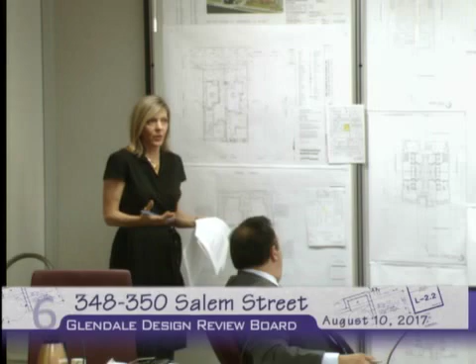This proposed site plan is very consistent with a lot of the multifamily residential projects being proposed along Salem Street. There is additional common open space at the rear for use by residents, and the roof plan notes a significant square footage, almost 1,000 square feet plus of roof patio area to be used as common open space as well.

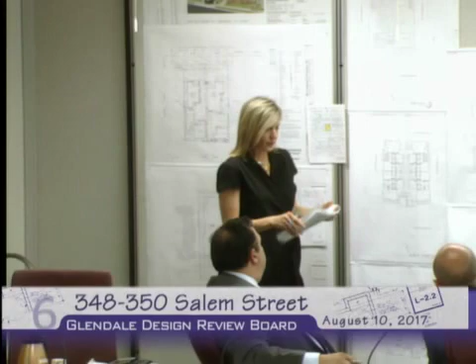In regards to the actual mass and scale, the project complies with the height standards for multifamily residential. It is 3 stories, featuring step backs and tiering sections as noted on the elevation drawings, with different use of materials on certain elements. There's a very decorative front facade that screens the elevator and stairwell, accented with additional fenestration patterns of glazing, horizontal and vertical, and changes in material and plane.

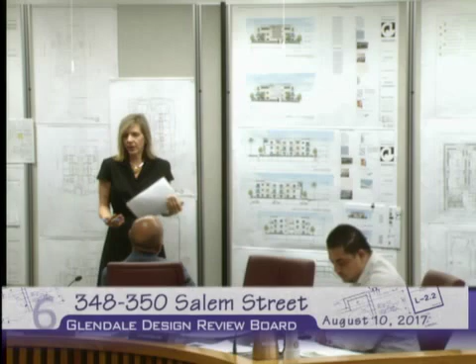With that breakdown of the elevations, the entire building mass does not appear as large. Last but not least, it's a contemporary design that fits within the neighborhood, since this neighborhood along Salem Street is rather changing. Most of the latest construction is contemporary, with clean lines, clean finishes, stucco materials, grays, tans, and whites, giving an overall crisp, streamlined architectural style.

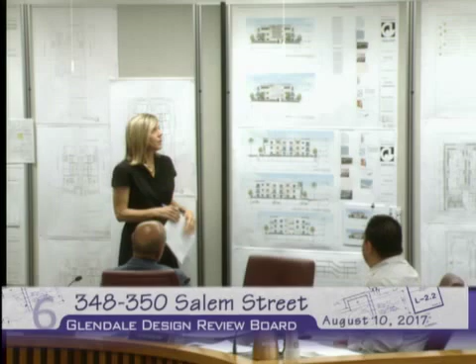The project complies with all of the zoning standards for the R1250 zone. That gives a brief overview of the staff presentation; the staff report went into much greater detail, but I'm available to answer any questions you may have.

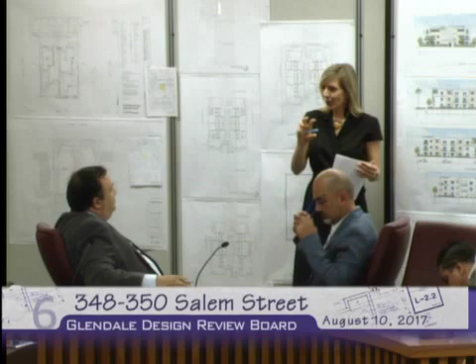I have a couple of quick questions. It looks like there's a couple of design options being floated, which is kind of strange. I'll allow the architect to speak to that, because there was some discussion regarding the modular patterned block that is actually transparent, not a solid block. There was staff discussion about whether it's too angular or too whimsical, so the architect submitted two alternatives: one a more circular bubble pattern for the block, and the other a much more regulated, stylized version with straight edges.

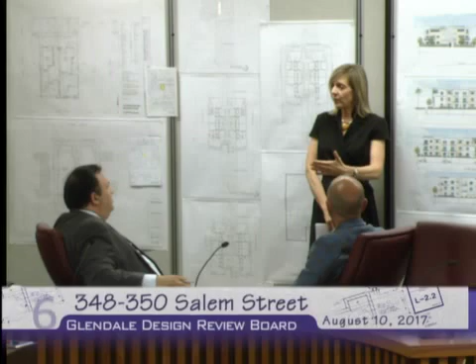On the public space requirement that gives an extra unit in front - is that public to the building or public to the public? It's not really public to the public, it's additional common open space, so the entire building has to be set back even further. As opposed to having greater density pushed out to the front of the street, the density is held back from the street, giving more relief at the street edge, with that area being landscaped.

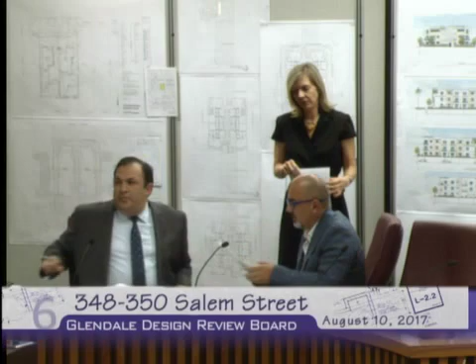I have a question about condition number 4, can you explain that a little bit? It's a little confusing. Staff is recommending approval with 5 conditions, and the 4th condition is to clarify the fence wall elements above the subterranean garage podium along the interior property lines, identified on section drawing sheet A4.0.

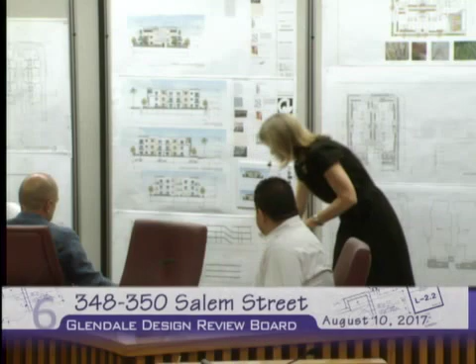To comply with the zoning code, the combined height of the garage and any solid wall or solid fence atop the garage in the setback area must not exceed 6.5 feet adjacent to the ground level design. So when looking at the adjacent grade, the neighbor's fence wall above the podium on the garage side, if it's above a certain height, has to be more transparent and more open - it can't just be a solid wall, which would emphasize a mass next to the adjacent neighbor.

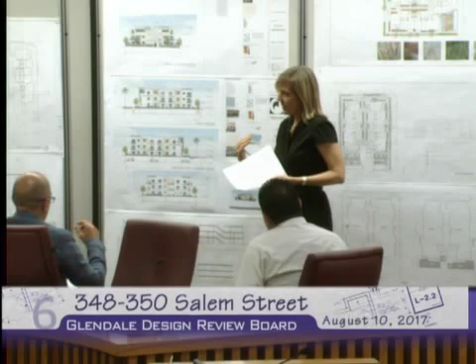Is there a section that shows that? Because it seems like everything is below grade. We're just stating this as a prelude for them to submit into plan check - just a note that your fence wall has to be transparent on the upper portion. So if further engineering is done down the road to make sure this is buildable, we don't want to see a fence wall larger than 6.5 feet.

6.5 feet, correct - and that's measured from the adjacent grade to the top of whatever railing or fence they have. So anything above that, if they need, say, a 3-foot retaining wall for the garage and then another 4 feet on top, that extra portion has to be open at that point - it has to be a wrought iron fence or something compatible but open, as opposed to a solid block wall.

And just to go over the other conditions: the first would be to reevaluate the colors and treatment of this rear facade, facing the neighbors directly to the back, to make it more consistent with the other 3 elevations. The second would be to provide gates or extend the landscaping planters to provide separation between the private patios and the common walkways, to make that a more meaningful separation between the two.

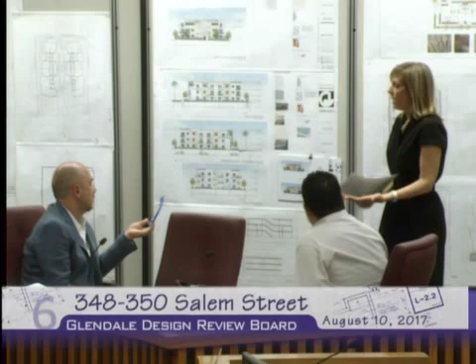Well, they're using the same colors. They're proposing, unlike here where you had these elements that break up the facade as opposed to one long white facade, here there's just a solitary, very narrow vertical element on the ends. So it's not the color, it's more the use of the material. Whether it's the material or the color, I'm going to allow the architect to use his expertise and creativity, but to mix it up a little bit more as opposed to having a solid white wall along the rear.

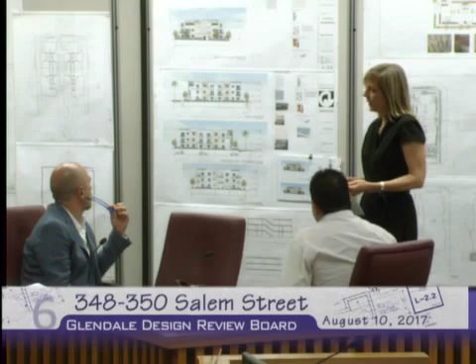That explains it. Okay, we have two cards.

The applicant, Andre, if you want to. I'm... well, sorry, you're going to have to speak into the microphone and introduce yourself. I'll just pass it to Jean-Pierre. So if you don't mind stating your name for the record, please. Good evening, Jean-Pierre Valadian, address 408. Jean-Pierre Valadian, we're the designer of the building, and thank you.

I went over the conditions, I have no problem with the conditions. We'll clarify it further during the plan check process. And then, as regards the rear elevation, we'll work it out.

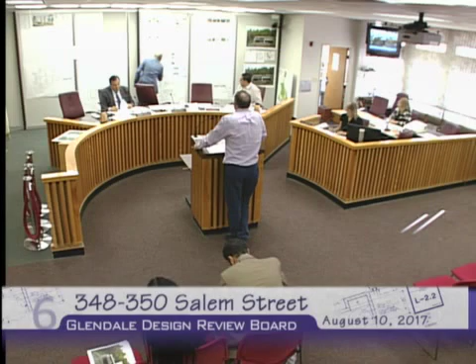I could break the bottom first floor, make it a darker shade to give it a little more weight to the building. We have these bump outs, so we could wrap that stone around them, and it just gives you what you're looking for. I think this is already a natural way of addressing it the same way. That will do, yeah, I could take care of that. That's no problem, I'll do that, I'm okay with that.

Beside that, regarding the modular art for option A and B, it was a funny thing because everyone liked the style at the meetings, so we said, let's put the two options. I'm okay with either option. Which one do you like? I'm using... I like the circular one more. Again, I'm open for your advice and opinion, I respect your judgment too, I'm not married to it. If by democratic vote you guys like the circle, I'll go with the circle, otherwise we'll go with the other one. I have no issue with it, either way it will look nice.

That's about it, if you have any questions, I'm here. Thank you. Do you have any questions?

Yeah, I have a couple of just really quick ones. You have 28 parking spots in this project, I'm assuming that's 28, correct? 28. Yeah, so I'm assuming you're putting in 2 handicap spots.

Is the code requiring you to do any electrical vehicle stuff? Yeah, we've been facing those requirements on other buildings. This building has actually taken care of that, it's marked here with EVs, we revised it. Oh, it is, there's EVs. Okay cool, yeah, that's good to cover the EV and all the recent requirements. Yeah, this project is being taken care of.

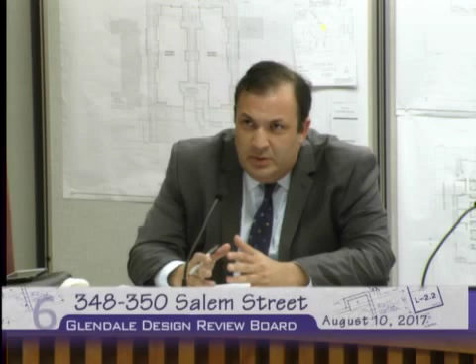Good, good, it's good to see, as a public comment, a project coming in that's actually providing sufficient parking for the residents, plus some newer vehicles, and also taking cars off the street, which is always a concern on some of these smaller streets in Glendale.

So it's good to see that. Sorry, did you have a comment? And also,

The handicap parking is on top of the minimum requirement, so it's not combined within the requirement. Yeah, we've been doing that lately, it's good to avoid problems. It creates issues if there's multiple people that are handicapped in a building, handicap spaces. And then when they're writing all the maps, dividing the parking for each unit, it's been creating problems - who gets that handicap stall. So we've been trying to add that additional handicap separately.

Which brings me to my other question - is this designed for sale as a condo, or designed as apartment? They could change their mind later. The design could lend to both, but it is designed as a condo. We have the party walls and everything. It's designed as it was being set up for subdivision. It's permitted for apartment, but in the future if they want to apply for condo, they could easily do it. I understand.

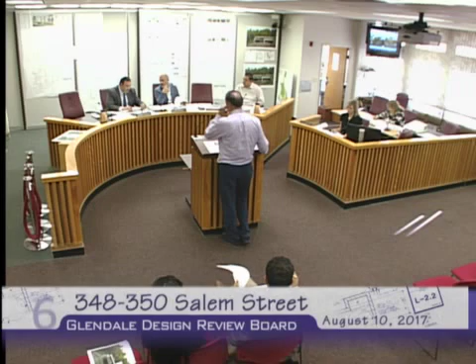The reason I bring that up is there's a shortage of housing in Glendale, as you know, sellable housing. So I would always encourage having more sellable housing if possible. That's all I have, thank you.

Thanks. We don't have any more cards. I will close the public session.

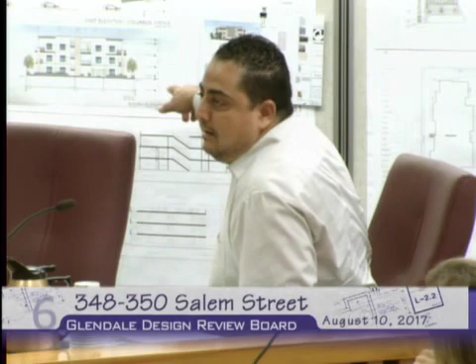I think staff report addressed most of the issues, and it's a straightforward project. Clean design, I like the design, clean, contemporary. I agree with Mr. Malikian on the rear elevation - you probably need to wrap those just to break up the masses.

Other than that, I agree with all the staff conditions, and in terms of options A and B, myself, I like the circular one because I think everything about this building is contemporary and has that straight line look. I think having something circular kicks that balance. But other than that, I think I'm in support. Good project. Thank you. Charchian?

I'm going to join those comments. I think it's well designed at each level of the project, from the subterranean parking where it has a very good layout, provides additional parking, and also the overall design is using some quality materials. I'm not going to make a vote as to A or B on the modular panels - I'll leave that up to you guys. I think they're both acceptable for the project, and so I would be in support.

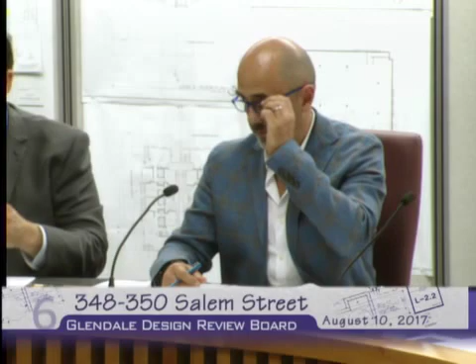I as well agree, I think it's a very nice project. It's rare to see development - if you're allowed to do more units and you come in with the lesser units, which is encouraged, and therefore it allows more open space. I do agree the circular pattern is a better choice rather than the rectilinear.

Other than that, I want to go over the mitigated negative declaration - if you guys had a chance to look at that. I had no concerns. Yeah, everything was less than significant. So if we're going to agree on the conditions as staff, I'll make a motion to adopt the final negative declaration.

I'll second that. I have a motion to adopt the final negative declaration, made by Board Member Charchian and seconded by Board Member Benlian. In terms of a roll call, Board Member Benlian? Yes. Board Member Charchian? Yes. Chairman Malikian? Yes. The motion passes to adopt the final negative declaration, and then that would go to the Design Review Board.

Whether or not you would approve with conditions, with staff's conditions, and essentially alternative B, which is the circular. I'll make a motion.

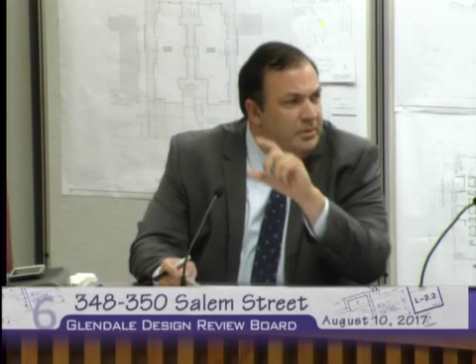Before we do that, there's the additional condition that the chairman brought up, seconded by Mr. Benlian's comment, about changing the on-grade color scheme by wrapping around - no, the rear - addressing the wraparound with the stone. For condition number... condition number 1 is to reevaluate the colors and treatment of the rear southerly facades. So for condition number 1, I think the suggestion was to incorporate some of the stone from the two sections. I don't know how you would word this.

So maybe bump outs in the back area would be wrapped with stone to address number 1. Would that be incorporating such stone? Okay, so it would remain up to them which direction.

With that modification, are there any other conditions that you would like to add? No. Okay.

So with that said, is there a motion to approve with conditions? I'll make the motion to approve with conditions. I'll second. In terms of a roll call: Board Member Benlian, yes. Board Member Charchian, yes. Chairman Malikian, yes. The motion passes to approve with such conditions.

Okay, this one. Okay. The next item on tonight's agenda is a new single-family residential project.

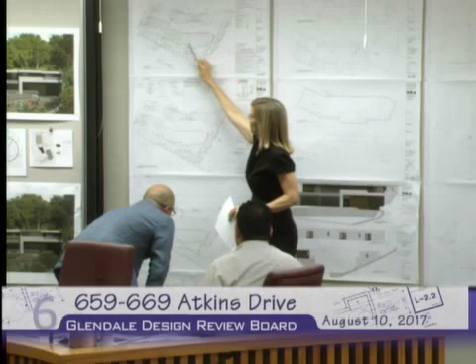It goes into a 2-car garage that's located at the ground floor level of the house, and then you'll have the 2 levels of residential living space atop this particular building pad that's constructed essentially topping off the sloped front elevation. So you'll notice if you went out to the site, there's a rather steep slope, so they are proposing to do grading at that location, put in the driveway, put in the retaining walls for the driveway, and then put in the building pad that somewhat conforms to the topography or to the topo lines of the site itself.

So they are cutting off that front slope. They are proposing 15-foot high retaining walls per code at the rear.

Those retaining walls are 15 feet back, and this is a building code requirement. So this is working hand in hand, building code and the zoning code. They have to have a retaining wall that's a minimum 15 feet from the building wall.

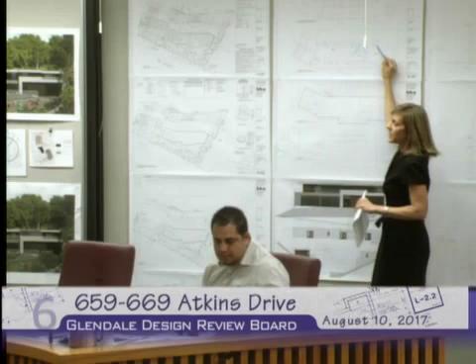As noted, the ground floor is actually constructed into the hillside, so there are no openings on the ground floor and no openings at the rear. It's essentially the second floor, noted here, that has the rear retaining walls and the patio area to the rear.

There were discussions with the applicant regarding the particulars of this site. Can you possibly have a driveway? Can you possibly have a garage that fronts Atkins, that drives straight in, similar to the other surrounding homes in the neighborhood, which were built longer ago under different codes, majority anywhere from the 1940s to the 1960s, some into the 1980s, with a straight-in shot from Atkins Drive with a 2-car garage and a shorter driveway. You'll notice most of those driveways now are legal non-conforming.

They don't have the required depth. They don't have the required setback of today's code, which in this case, in an R1R zone, is a 15-foot setback for the building itself and an 18-foot setback for the driveway.

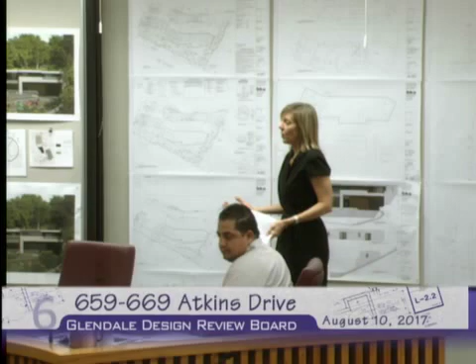In discussions, it seemed like it would be very difficult, and in this case it would require multiple variances if they were to grade into the lot and have the driveway on the same level as the street, because you would be building retaining walls that would exceed our code, providing an 18-foot deep driveway and then a house on top. Without variances, that type of proposal would not be able to move forward.

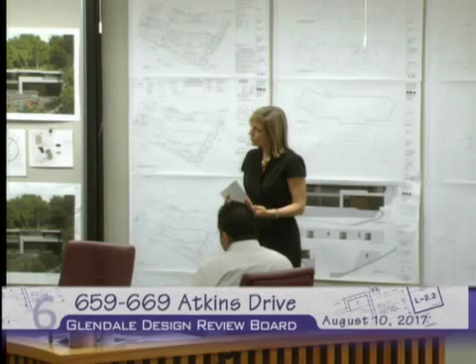So in this case, I don't understand the variance for what? I mean, it's been done before. So what is the variance for?

The variance—it's not for the 18-foot driveway. If they wanted to propose a straight shot driveway with the 2-car garage oriented towards Atkins Drive at street level, you would either have to have a reduced setback and driveway length, which would require variances, or if they were to cut greater into the hillside to provide that 15-foot setback and 18-foot driveway length, you would have retaining walls on the side that exceed code.

So instead, the applicant came forward with a code-compliant project. In this respect, staff could see the hardship this created, because in one way you're proposing a project that doesn't comply with code and would need variances, or you want a code-compliant project—which is better, which is worse in terms of massing? The retaining walls reduce the height, so I'm not sure.

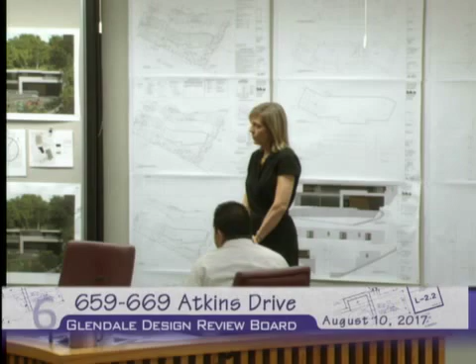You can have a 5-foot retaining wall, 7 foot in the front—you would have it much greater then because of the existing grade, but then you would step that back and have another consecutive retaining wall. You're limited to 5-foot retaining walls in the front alone—parallel 7, perpendicular 5. Based on the slope here, because of the grade differential, it would be way more than that, probably double, if not more. And that's the reason why.

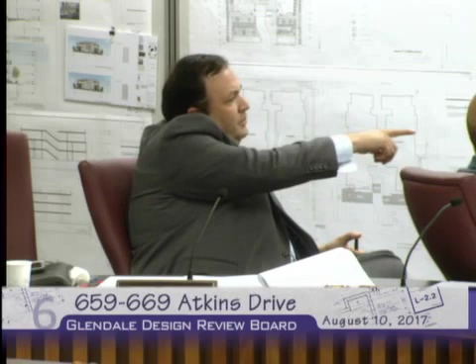I have some questions. So the first floor plan, and I know we were dealing with a revision, but the first floor plan shows the garage at about a 30-degree angle off, and then the cutout that we have on A2, A1, A3 shows a different layout—not 201, but A1, A001, A002 shows a different layout for the property. How does that match up?

I'm not seeing that. Yeah, those are good questions—those are coming up. So essentially, what you're seeing here would be the outline of the second floor, and underneath here on the dash line, this is the garage. They cut the plan, so this would basically be the outline of the first floor that's built into the hillside, and above, the second floor creates this mass that hangs out.

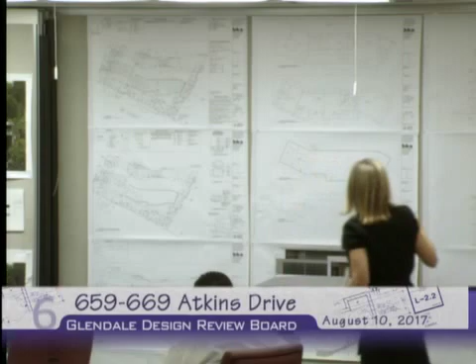That overhangs. Yeah, there's this huge overhang then. According to their cross-sections that they've submitted, they're showing the majority of the home, the second floor, as being pushed back and not pushed forward into the street. So if you're standing here, the second floor is above your head, correct? And this is all overhang, correct?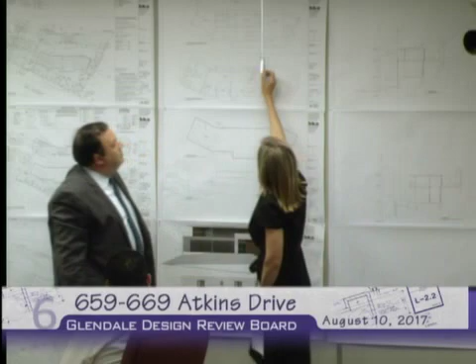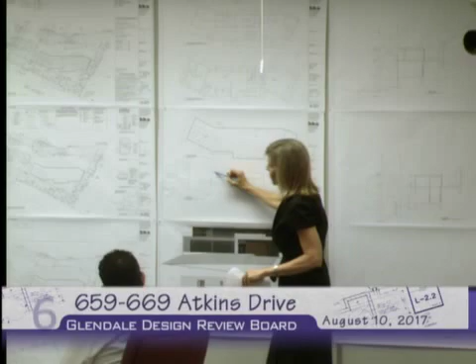And this would be basically a balcony right here and the deck right here. Yeah, and in fact this particular portion right here is actually the roof line. So it's not so much the second floor bump out, it's this roof line that projects over. Yes, it's that roof, correct. It's that shape, that elbow shape that's above the front entryway.

So this entry elbow right here is this portion that projects over the front. So I'm just trying to understand how massive that's going to look.

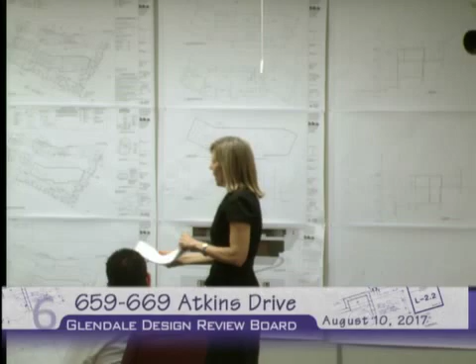Again, those were some of the concerns because the staff report was very detailed regarding the hillside design guidelines and the project proposal. In terms of mass and scale, when staff analyzed the neighborhood context, this was larger than the average size of home in the neighborhood within 300 feet. It was, but it is within the range of existing homes in the neighborhood.

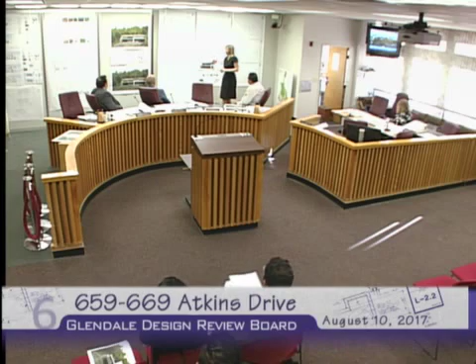But because of the overall width of the site and the house, and the 62% slope, there was a little bit of concern with regards to the mass and scale, because we had worked with the architect, or with the applicant. And this is actually after a number of revisions, because this project started in February of this year, so a number of months ago.

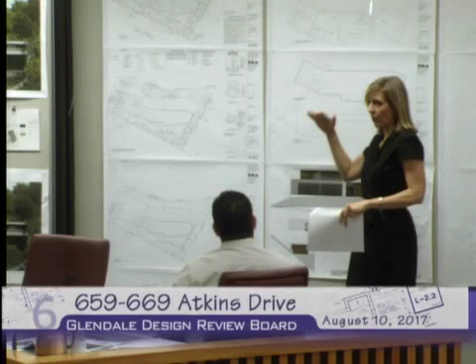They have been working to modify the design to reflect the topography as required in the hillside design guidelines, because the guidelines basically state you need to follow the topography of the slope. You need to step the project back in regards to the upslope or downslope condition. They have made revisions to do so.

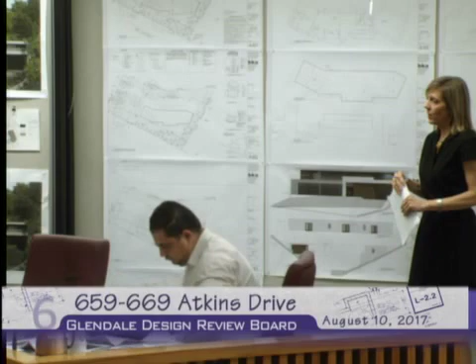These were the drawings that were submitted for the design review. Before you, you have a revised project that was submitted just before, like a day or so before the actual design review board hearing. And this revised project that you have on the dais was designed to address staff conditions that were in the staff report.

And these were the concerns that the elongated mass sort of accentuates the horizontality and accentuates the mass across the lot. In terms of, and I don't want to go down point by point on mass and scale, but in terms of the actual design, staff had conditions to decrease the overall size and width, perhaps shrink it, because it is a 3,000 square foot house.

They are unfortunately faced with the fact that it's a very blunt lot. It's not very deep. So their house itself ranges between 15 and 20 feet in depth. It's not a very deep house. So unfortunately, they're limited by the slope in terms of the length or the depth of their house.

But could you possibly decrease the overall width to make it more, while maintaining the fenestration? Staff actually felt we supported the contemporary design and the look of it. They have fenestration patterns, there's a lot of glass, there's a lot of horizontality emphasized over the vertical, except for some sections such as these vertically oriented retaining walls at the driveway.

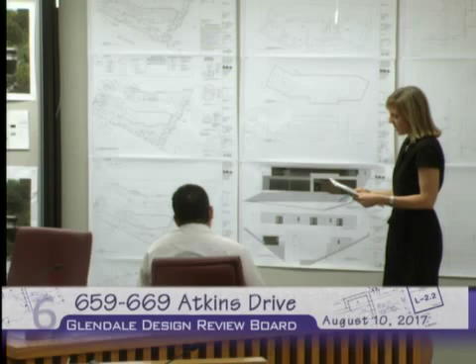The fourth condition was to redesign the vertically oriented retaining walls at the front. Either a horizontal poured concrete finish or a burnished block should be proposed. The fifth was to revise the landscape plan to add additional landscaping, trees, taller shrubs, and climbing vines at the bottom and front of the retaining walls.

This is evident here, where in the original proposal you had the vertical retaining walls and the grading that was done. Mind you, unfortunately, because of the R1R standards, you cannot fill much when it comes to the front setback. Code does not allow you to backfill this buffer area. We can somewhat change it, they'll have to modify it, but you can't artificially come back and fill that section. So they're working with what they have.

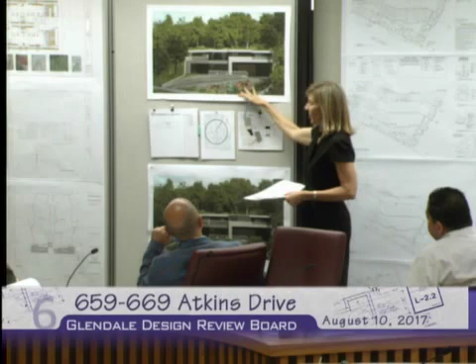Staff felt it really needs to be augmented, because this perspective drawing is a nice, beautiful picture, but when you look at the actual landscape plans themselves, it doesn't correlate with the perspective drawings.

Has this been changed in front? Have you seen the previous design that had the stepped retaining walls in front? No, their soils report has a completely different design. This was not worked with. So the soils report was based on the actual slope analysis, the bedrock, the foundation, and so on. No, we have not worked at all with the proposal that's in the soils report. So I'll let the architect speak to that.

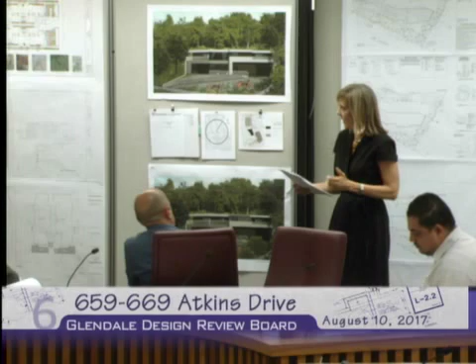The last condition was to clarify the proposed grass area at the rear patio. Again, looking at their foundation plans, what we're seeing here is essentially a solid structural foundation across, whereas some of their plans show grass and landscaping along the rear deck, which would not meet what is shown on their cross sections.

So with that said, based on all these items, staff at this point is proposing these conditions with a recommendation for return for redesign. Now it's up to the board to decide. You can take a look and see, is it compatible, is it not compatible?

Mr. Chairman, I have a couple of questions. Is there a height requirement that they're at, or is there a possibility of going to a third story? Well, they are at this point meeting the height requirement for R1R for a two-story structure.

So they could, if they wanted to, and this would be a little more difficult because of the whole grading situation. When you have a parallelogram in an R1R zone, if within that four-sided polygon it's more than 40% slope, they would be allowed a three-story structure, but they would still be within that height limit.

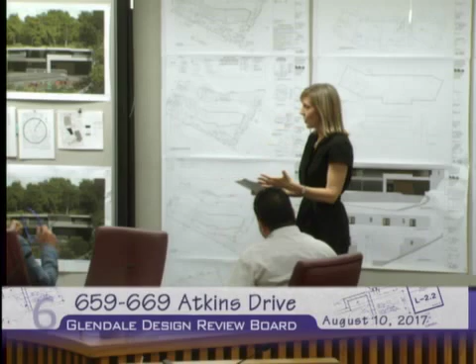So right now they're at the height limit. Whether you have a two-story or a three-story structure, that would be the difference, but currently they're at the maximum height. This is because they have to include the portion of the retaining wall used for the driveway, since it's part of the foundation for the house above. Their height is taken from the point at the driveway, where the retaining wall is, to the very top of the flat roof.

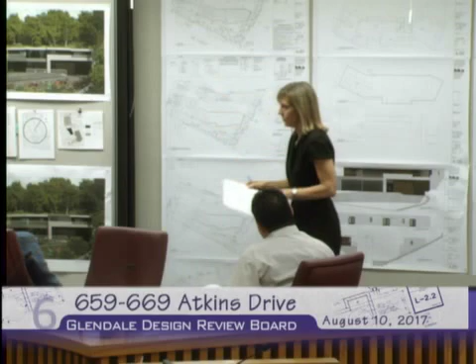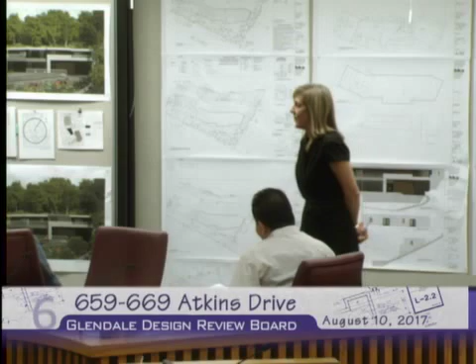And speaking of that driveway, there's this revised rendering with grass, or some sort of vegetation, I shouldn't say grass. Is there a revised landscaping plan to explain how that's going to happen? That's a good question, because when staff took a look at the revised perspective drawing showing climbing vines along this retaining wall, unfortunately staff does not see any landscape pockets or planters where that landscaping would actually be growing. So perhaps the architect and applicant can address that issue.

Thank you, I have a quick question. Actually, I have a couple of questions, but I'll ask the architect about the massing between the new and the old, because they look the same to me.

But I have a quick question for you. The arborist report talks about a proposed new structure of 1,400 square feet, and this is a 2,900 square feet. I think that must have been a typo on his part, because he actually looked at the project and he might have accidentally made comments regarding another project that he was referring to. Yeah, because the site plan kind of matches what we see. Thank you.

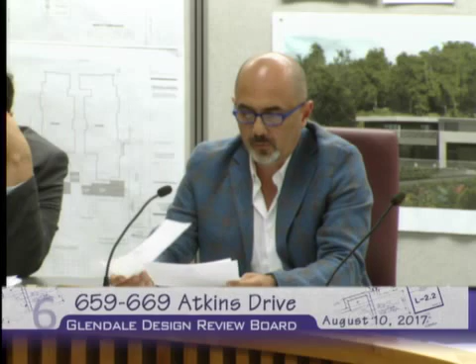All right, let me see what I did with the papers. So does the architect or does the applicant would like to come in?

Architect? Okay. Oh, forgive me, do you mind, and I apologize for continuing, just if you would bear with me just a few more moments, please.

We received correspondence regarding the project. There were emails from a Mr. Thomas Marsh, who resides at 662 Atkins, directly across the street. He had requested a continuance because he is out of the country, to have the meeting on August 24th when he would be back. It's up to the board to grant or not to grant that continuance so he could be present. This is the neighbor directly across the street. All of these letters and emails were printed out and put on the dais for your review. So there is a continuance request until August 24th for the neighbor directly across the street.

There was also an email received from a Mr. Mark Walkoff, who resides at 680 Glenmore, across the hill looking over to the site. There were concerns stated with regards to the site and slope stability, since this would be development on a steep hillside lot. They don't want to see something happen again like what happened a number of years back in 2005 at the property between Gladys and Glenmore, where there was slope failure, street closures, and home problems. They're very concerned that wouldn't happen again.

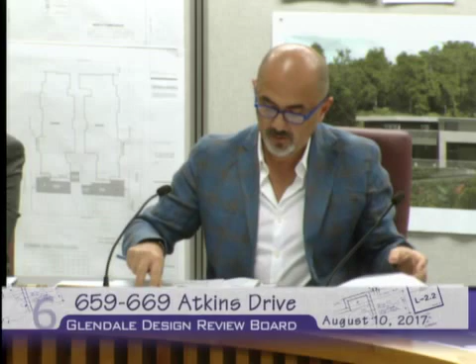Again, it comes down to feasibility. Let me just answer your question quickly - it's a very small triangle of subterranean space, and that little pocket dictates your entire building height. My point is that if you look at A303, the cave-like portion is a very small triangle of the site. Otherwise it's a flush retaining wall, and there's only so much that's feasible to do.

Going back to your soils report - do you have it in front of you? The soils report cuts a section diagonally through where the garage is, and it goes across right in the corner. I'll show it to you so you can refer to it. When you look at that section, this whole bottom portion is all bedrock - this entire thing, based on this, is bedrock.

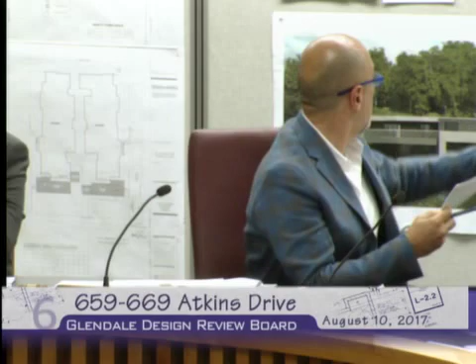How can you plant all of those trees and plantings in the bedrock - are you going to drill into the bedrock and then dig into them? Actually, a lot of those plants, which are succulents and drought tolerant, really only need a few inches of topsoil. As for the trees, yes, you do drill into the bedrock - I've worked on hillsides which are entirely bedrock. So it's a mix of drought-tolerant succulents and actual trees, not just one or the other. There will be trees, succulents, and creeping vines, which will screen the massiveness of the walls.

That's my question for now. Anything else? I have a couple of questions.

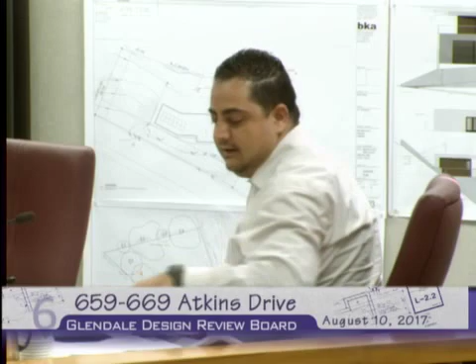Can you explain the difference between the massing of the submitted design versus the one we've received today? Looking at the sections and your comments back and forth with staff, you talk about addressing the hillside guidelines by following the topography, but I see the same exact sections in the same places - I don't see the sections change. The section that was cut doesn't show it very well. If you look at the floor plan, particularly the second floor on sheet A101, it's fairly straightforward comparing the old versus the new - there was an open-to-below space on the previous design.

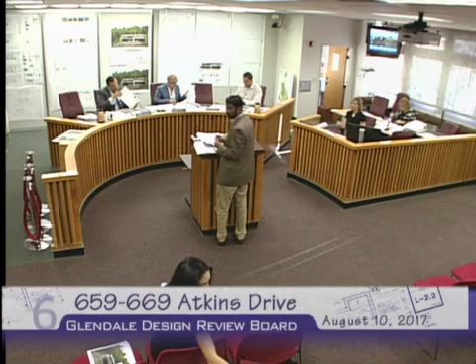If you don't mind, since you submitted full-size plans, I can put those up next to the existing ones so others can see. These are the floor plans - the floor plan should be sufficient to show the differences. If you put this one over this particular one... excellent.

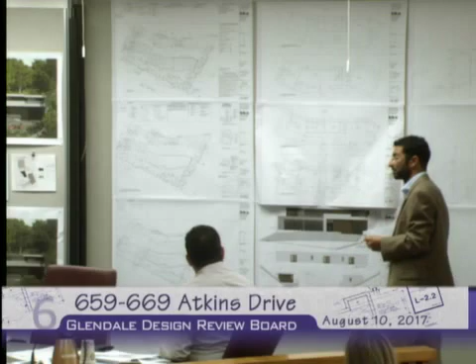We've made a number of revisions over the course of the project, starting back in October, so it's not just A and B - this might be version P or so. Between the submitted and revised versions, the previous design had an open-to-below space shown with a lot of glazing, but the second floor was already recessed back for the majority of it. Because of planning's latest comments, we tried even harder and revisited it, so we lost the open-to-below space and made it more deck. The only portion that's stacked now is the stair and its landing - everything else is recessed according to the topography. I do have one word of caution, though, about mandating completely stepped designs everywhere.

I don't know if you remember in New York in the 50s, they had the whole wedding cake template, and eventually after the first 30 years, they realized that mandating complete uniformity in the planning guidelines resulted in more of a problem. So nevertheless, in the most recent version, really only one portion is stacked.

You can see the garage dashes back, sets the orientation, and everything else is really recessed. This, by the way, is only about 15 feet, which for a new, close to 3,000 square foot house is absurdly narrow.

Thank you. Any more questions? Yeah, I have a couple.

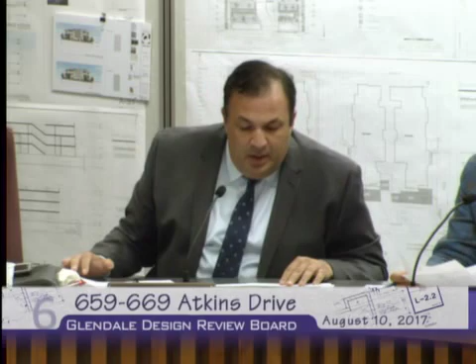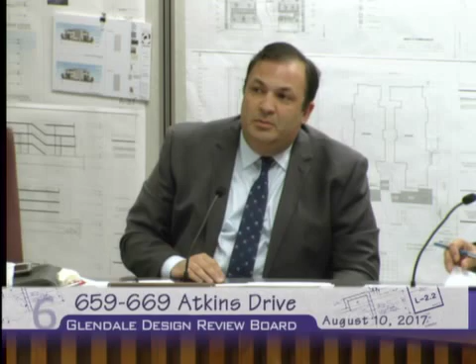You've presented a rendering to us that we received today. Usually we get our packets about a week and a half out, and it shows vegetation, creeping vines on the garage, on the driveway retaining wall going to the home. Where are those creeping vines supposed to be planted? Didn't have time to add those to the landscape plan, but creeping vines don't take much of a planting area—narrow, like 4 or 5 inches. City of LA, for example, the zoning administrator allowed us to conceal an excessively high retaining property line wall with just the 4 or 5 inches we had, and that's sufficient to really allow a creeping vine. So there will be pockets cut out along the edge of the driveway to allow for planters, to allow the creeping vines to creep up.

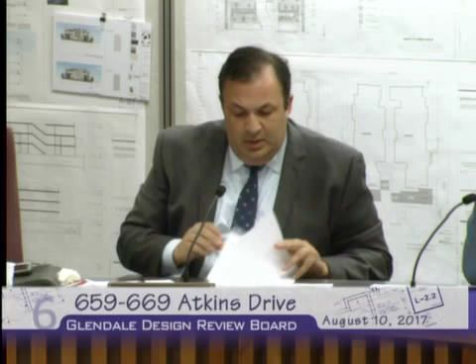Yes, and so we think it could help, replacing it with 4 oak trees. Where are you placing those 4 oak trees? On the south side, however, from conversations with the neighbor on the north side, we may want to consider relocating them for privacy and shade.

If you look to the south side, all the way to the left of the site plan, of the landscape plan, it says 2 new oak trees, and then it's got 2 below it. Oh, 2 and 2, yeah. Upper left corner, right below the upside down 80.

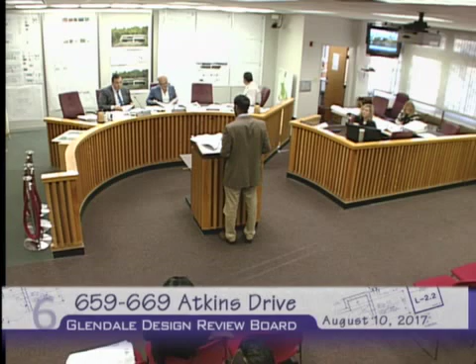I'm trying to find where it is—the oak trees, if you take a look at your arborist report on pages 18, 19 and 20. I didn't see where they were adding them. If you have the site plan, I can show you. Sorry, on the arborist report, where the arborist report is recommending adding these because of the bedrock issues, and because obviously there's a bedrock outcropping in this lot.

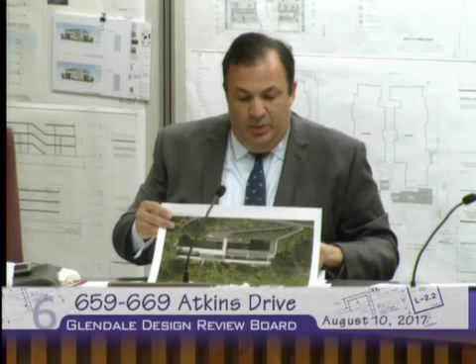That's why there's not a lot of vegetation over the bedrock. That's why you can build on this lot potentially, because the oak trees are not in the center of it. I'm wondering where they're going to plant these additional ones. You said on my site plan there's... Yeah, on the site plan, it's in the upper left corner, high on the site, which I believe is filled with a little bit more topsoil. You mean A and B? A. Oh, is that what the notations are?

A001. Oh, no, I'm not referring to that. Is that the site plan you have? And you can actually go up—mitigation tree map. Oh, so here it is. It's basically this figure 2, sub-noted A, B, and C, and A is the suggested location. Actually, that location A is really kind of where we...

But if we can, we may relocate on this side, which the neighbor has raised concerns about, privacy, et cetera, et cetera. But that's where you're removing the tree from. Yes. Okay.

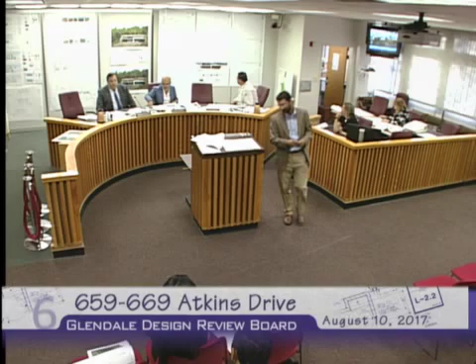All right, no further questions right now. Thank you. Oh, actually—does the applicant like to speak? Anya Abramian?

Hi, I'm Anya Abramian, and hopefully the future owner of this property. I just want to give some history about this project. When we started it, obviously it looked like a completely challenging lot—basically it has a hump in the front, and then it kind of slopes, not that high.

And we figured there are properties next to it, so we should be able to build something on it. So we started thinking about how we can do the garage, and we worked with Mr. Bijan throughout the whole project. The driveway was the most challenging part. And of course, given the linear way of this house, we have to only use the length of it because we can't go too far deep in.

As far as the oak trees, we would like to preserve all of them. However, number 14 had to be removed because of the construction and the turnaround of the driveway. We also noticed half of the roots are gone because of the next door neighbors. We couldn't preserve it, and we talked to Jeremy about it, and he suggested we can plant 4 other trees next to the other oaks. So we'll be planting 4 more.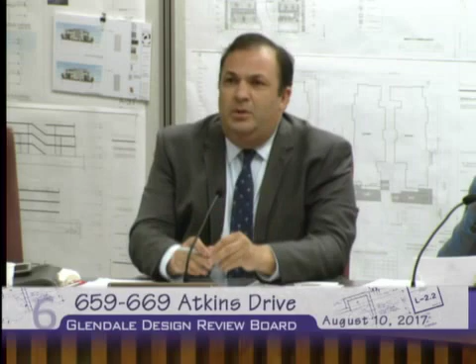You opened your comments by saying you'll hopefully be the future owner of this property. Yes. And I just did notice that there was another owner listed on the property profile. So are you not the owner? As of current, I'm in escrow. I've been in escrow with the condition that Glendale City will give approval to build a house on this property. So that's 9 months of escrow. A smart way to do it, I guess. Thank you very much for that clarification.

And then I had one other question, but I think I'll remember it. All right, so we'll leave that for now. Thank you. Thank you. Thank you.

Vahe der Gulastian? Hello. And I'm sorry, your name for the record, please. Vahe der Kalusian. Thank you.

I'd like to start by saying I have a few documents here. If I can hand them off to somebody, is that okay? Please, and do you have copies for everyone, or would you like me to make copies? No, if you can, I just have one copy. You only have one copy?

Yeah, okay. It's basically a petition that we've started in the neighborhood on change.org. The first page has a description of the petition, and there's a couple other documents. One of them is the signatures of the Glenoaks Canyon neighbors, about 16 signatures. And there's another document with different comments from those neighbors voicing their concerns on the proposed construction site.

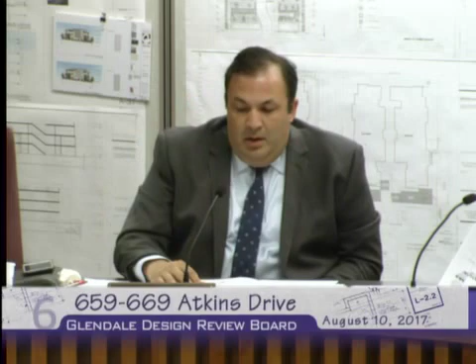I also disagree with the architect's comments that if you're standing on Atkins, this house is not visible or visible at a very small angle. I think this is a pretty massive building. I understand why it's massive and very linear, because that's how you can build a livable size home. But I think it hasn't been thought through as far as how to break up that linearity.

The revisions that address the staff comments are breaking it up but hiding it at the same time, behind this staircase piece, I think. So I think we have a lot more that we need to see in order to make an educated decision as to whether to approve this project or not. And what I have in front of me, I don't see that. I don't see enough information.

The soils report is great. I'm glad that we have a full soils report, but it's very clear that it was not done and engineered with this exact project in mind. It was designed with a similar size project in mind. The calculations that normally we see for cut and fill are absent.

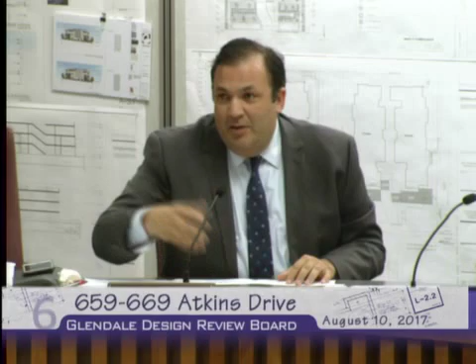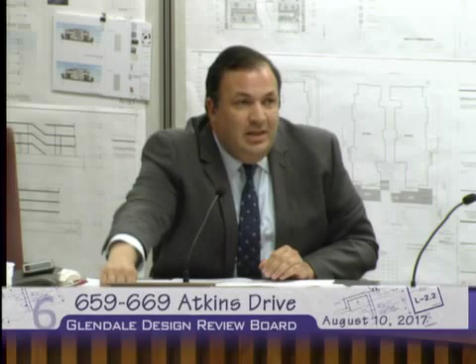It just tells us it's 1,700 cubic yards. Now, I am not, as members of staff know and maybe some people in the public know, I'm not an architect, I'm an attorney, so I rely on seeing the calculations. I did not see them in the geotech, I did not see them on the plans. I just saw numbers called out, and I don't know if those numbers are accurate based on just the sheer size of the cut.

And I'll stop there and let my colleagues comment further.

I think I'll add my voice to Mr. Charshin about some of the issues I have with the project. But I'd like to address a couple of issues the gentleman and the other neighbor brought up, in terms of stability and if the technical report is sufficient. It's sufficient, and this is bedrock, so you're not going to have an issue like down the street or whatever. So that's not an issue.

And in terms of insurances, no general contractor can get the project and start working on it. This will all happen when they pull their permits. They need that to be in place, so that's not going to be an issue either. And working hours are determined by the Glendale Building Department, so that's not an issue either. I just want you guys to get that peace of mind.

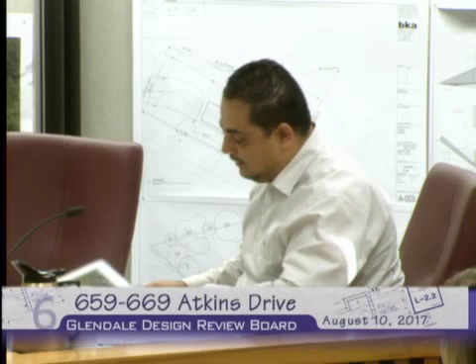In terms of design, I actually like the design in terms of material and the contemporary look. I think it fits well. I think they're using nice material. I like the linear design, but there are some

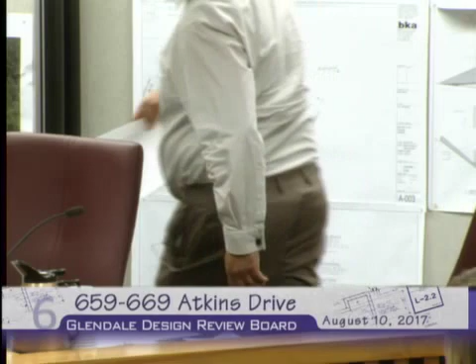major issues that I see, and I think most of it happens with the scale, with the mass in the front. When you look at it, it looks like a 3-story home, not a 2-story, because this retaining wall is here in the front. I mean, look at the proportion - this is a story, and this is maybe a little bigger than a story. And just by covering it with some vine, that's probably not going to work as a solution.

Other issues I have with the project, I think most of it has to do with the size of the house. Not to say that 3,000 square feet is a mansion or is big or anything, but the architect brought up that point - you just don't have much of a buildable area. You have 63% slope, you have an area that's filled with oak trees, and you're left with a very narrow strip of land, and now you're trying to fit 3,000 square feet on it.

Yeah, the FAR works well when you look at 12,000 square feet, but you're not building on 12,000 square feet. If you look at the slope analysis, and if you do it like how they do it in LA, you probably will be limited to 1,500 or 2,000 square feet.

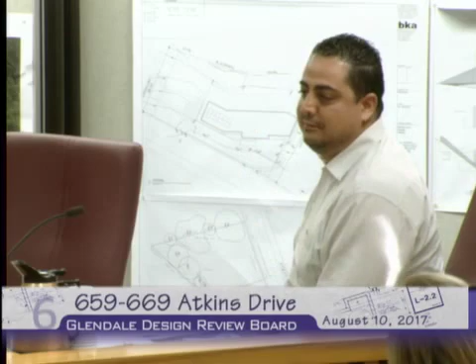So I think one way to address this is maybe just to reduce some of the square footage. I understand you're trying to break the mass on the second floor by pushing that central part in, but when you have a horizontal roof line, that's not helping you, because when we look at it we see like a big block. Once you start breaking that roof line and get away a little bit from the horizontality, I think that's going to help you.

And we're not saying wedding cake, I understand what you're saying - we're not telling you to do 10 steps here. But if there was a step here and you have this piece, and now this is a mass, and this is another mass, that's going to help you. That's going to help reduce that mass.

In terms of the driveway, I see this as one of the toughest situations. Like they're saying you can't - the variance, you need to go through the variance. City staff mentioned a humongous retaining wall in the front if you go that route. So I don't know what's the best solution for that. I can see the hardship, but in terms of what I see today, I think you need...

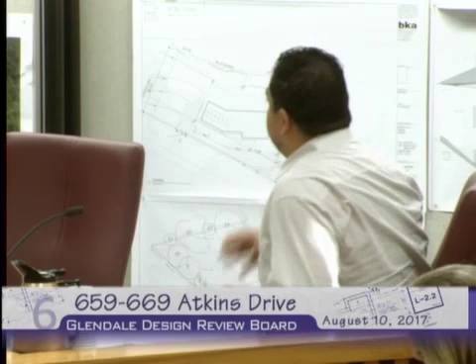I think the design is nice, the contemporary look is nice, the material is nice. I think you just need to work on your massing, just to break it up a little bit to make it fit a little better, and maybe you lose some square feet here and there. I think this covers my comments.

Okay, thank you. So just a quick note - the public brought up some comments regarding the legality of the project, the legal street, construction, and issues.

Unfortunately, we're only here to deal with the design of the project. We have a legal street, we have a legal lot, and this project is going through the correct channels. So we're here to review the design. Unfortunately, we cannot deny the project because of some conditions that are essentially legal, which they have every right to do. So what we have in front of us is a project that we have to review the design of.

Talking about the design, first of all, I'm glad that I saw the rendition that was brought in, the second rendition, because obviously staff had a good point and were trying to address some of the conditions and issues they saw. It's kind of disappointing to get to this point, and I'm talking about the applicant, that it seems like you didn't come to any resolution for them to recommend a return for redesign. But obviously, within a week or so, whenever you got the conditions, this was resolved.

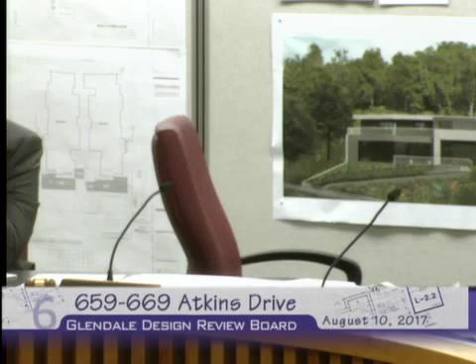I think that will allow you to create some planting area. And then also, regarding the solid wall - let me get my bearings right - on the south face, you have the opportunity to wrap the materials, and rather than create a solid wall... I'll be a little more clear, addressing this solid wall here by eliminating it or creating a different material that wraps around and softens that corner itself.

This definitely can be worked on, and I have a sketch I can put up. But the idea is that what's been proposed in this section, how this foundation or retaining wall has been pushed in, they can do the same thing here - pull this building back and then step this foundation to create a stepping planting area along the driveway.

You also have the opportunity to push the retaining walls that are holding the deck in, and suspend the deck out instead, so the retaining wall height is reduced and you have a floating kind of deck. There are a lot of design elements that will soften this project rather than creating sheer walls like a 7-foot wall here, 7-foot wall there, and simply saying this is the only solution. There are definitely hundreds of different types of solutions to create a much better design.

Now, stacking a building on top of these retaining walls - that's all we're going to see, I'd say at least, and I'll be generous, at least a year until these plantings grow. We need to figure out a way to minimize the impact of this building, assuming these plantings are not going to grow right away. So the challenge is how do we do this? Creating a 13-foot floor-to-floor height is a big number - a big number in a very small volume building.

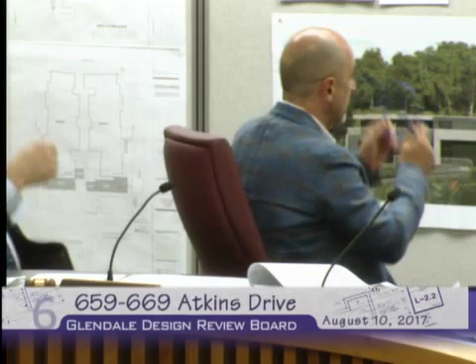What it'll do is give us an opportunity to reduce the height at certain parts of this building, and possibly lower it right over the garage area because of the stepping, because of the section you've shown us. Where is that section? Bottom right corner. I think it's right here.

Based on this section, how you've shown this, you have an upper building sloping down. Obviously this portion has already been addressed. Street side, as the hill is going up, you're stepping back, which is fine. But as staff brought up, you have a higher building with a flat, and a lower one, but you've created this flat, more of a commercial look rather than a softer residential scale building. I think the opportunity is to take advantage of this 13-foot ceiling and lower this section, stepping the building down as the hill steps away from the center.

Now it's really difficult to read the plans. If this comes back, I want a very clear set of plans that shows the ground level overlaid on top of the site plan. Right now all I have is a site plan with some hatching diagrams that I have to visualize how this is being impacted. The only other plan showing ground level is the first floor plan, without any reference to adjacent driveways, walls, retaining walls, steps, or anything happening at that level. It's a very difficult set of plans.

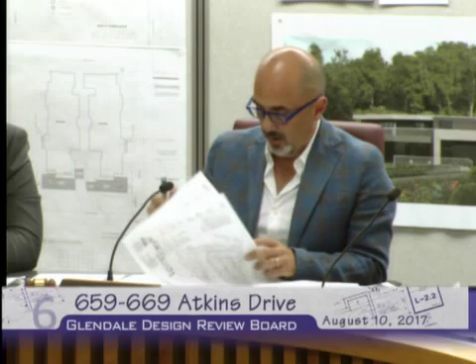Having said all of this, I want to go over the conditions that staff has put in front of us, and if we have time—but I think we're not going to have time, so...

So let's go through this really quick and wrap this up. What I'm hearing, Chairman Malikian—the first condition recommended in the staff report: decrease the overall size and span width of the residence while essentially maintaining the proposed architectural design and fenestration configuration along the front facade. I am not hearing support of that condition, because I think we're addressing the mass and scale more within the other conditions that are going to be modified.

Is that correct? So eliminate number one? No, keep number one. You still would like to shrink the width? Okay, so decrease the overall width and size? It can be. The width is relative to what they're proposing to do.

Right now they've created all these little masses. So to me, if this creates an elongated space, possibly softening this up, lowering this, it will solve that problem. But if they see they need to remove—I don't want it to be a condition to reduce the width, because I think reducing the width will create this square box, possibly through some of the stepping you talked about. So span and width is not that big of an issue, but if they want to reduce it, maybe that can be a consideration rather than a condition.